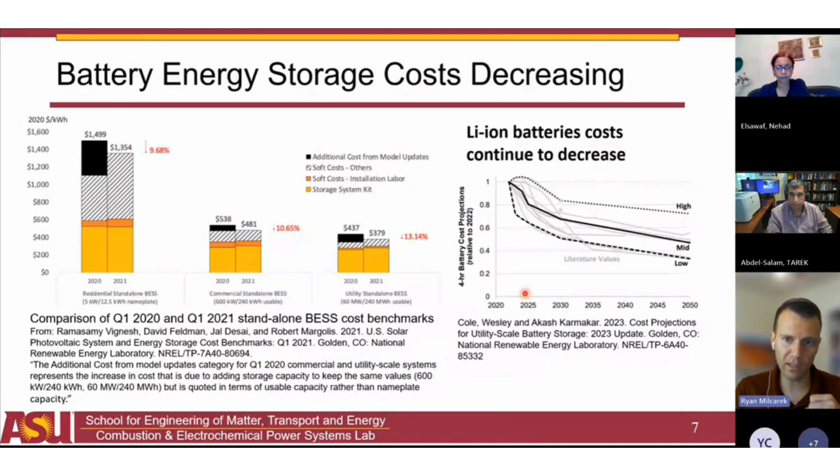But even a more recent report, we do continue to see this sharp decrease in energy storage costs. So this was based on a baseline of 2020, and here you see 2022 data. In 2022, when this came out in 2023, and projecting forward, we see a substantial decrease to the point where by 2025, we're projecting that we'll have had a 20% decrease in the capital costs of 4-hour battery energy storage. And then if we look ahead to 2030, only about 5 to 6 years ahead, we're talking about a 30% decrease in the cost.

So almost every year of this project, I've had to ask my students to go back and update the costs again, because it's changing some of the conclusions. Something that didn't really seem feasible a few years ago is all of a sudden looking more and more feasible as the costs change. Okay, so something to keep in mind, one of the reasons why it's being talked about.

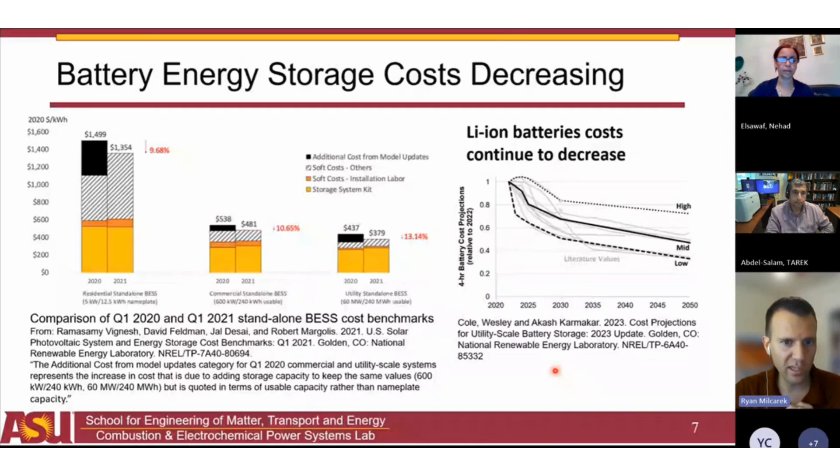So battery energy storage is increasing. What is it being used for? Well, there's a lot of usage, and if you'd asked me that question a couple of years ago, the answer would have been frequency regulation. Frequency regulation was always the dominant thing with energy storage.

But all of a sudden, the number one now is arbitrage. Arbitrage is the ability to try to leverage energy use and pricing for the times that you want it versus times that you don't. And all of a sudden, that has really seen a big uptick since about 2019. And 2019 and before, frequency regulation was pretty much everything, and then you had these other little usage of energy storage, but they were all minor in comparison.

Then since then, arbitrage has been on a steady increase, where we're seeing more and more capacity being installed for batteries for this use case. And so what is energy arbitrage with batteries, and how exactly do we take advantage of it, and how does it benefit clients? That's one of the things we'll be talking about, and then the extension of that to reducing carbon emissions is what we're going after today.

So a little bit of background just to make sure that we all understand why this discussion is happening. It probably doesn't surprise any of us that the cost of electricity varies, right? We're probably all used to that. We're used to probably seeing a graph kind of like the following.

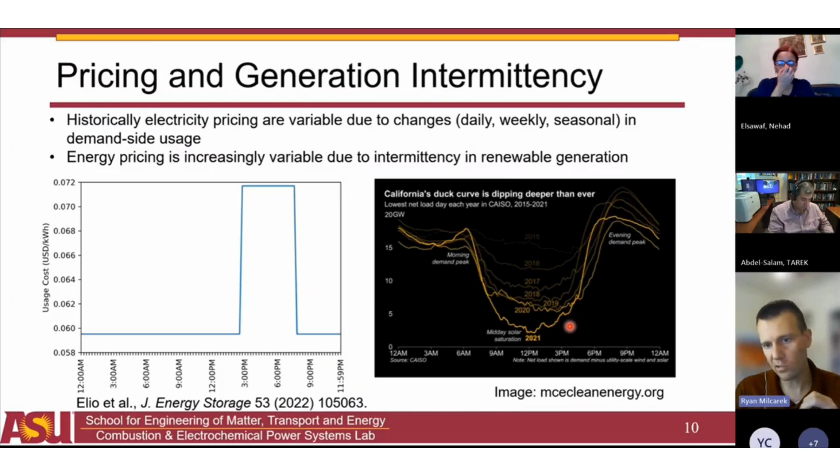Why is this happening? Well, I don't probably need to say too much about the California duck curve. We're probably all pretty familiar with that. We see, of course, this results in really high penetration of solar, results in really low electricity costs in the middle of the day. It's this ramp that's so concerning. That's what has electricity costs really jumping up towards the end of the day. And we'll see how we can kind of leverage that with a battery energy storage system here.

And that's the general expectation in conversations I've had, is that where we used to see peak pricing around 3 to 6 p.m., it was kind of typical. We're now expecting peak pricing to shift, especially here in Arizona, to later and later hours, as late as 10 p.m. and potentially beyond, which again is all related to some of these changes that we're seeing.

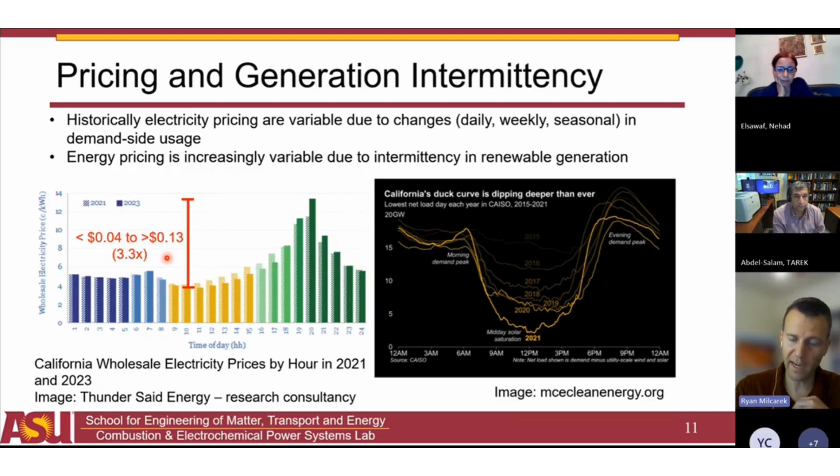So big changes happening due to renewable penetration, and all of a sudden things that maybe weren't as possible in the past are becoming real opportunities, and that's where battery energy storage is coming in with this energy price arbitrage. You can see here, if you just note that difference, 4 cents to 13 cents, that's more than a factor of 3 change, okay? So that's what we can take advantage of with a battery.

How do batteries do it? Well, we've referred to these programs as some sort of a demand response program. If we're just talking about this load shifting situation, we sometimes refer to that as price arbitrage, okay? It's the fact that the prices differ, and so we try to buy electricity when it's cheap, and then we try to give back or use our storage when it's more expensive.

So for example, we can discharge, in this particular client's case, in the afternoon. We've already shown that generally we have highest pricing in the afternoon hours, and that differs by location, but it's true in many places. This particular client, for whatever reason, can't shift this. They need to have this really high energy use at the end of the day. Well, the best thing for them to do is to just discharge it. We call that peak clipping, trying to reduce that demand on the grid and ultimately save them money in the process.

The other thing that you then have to do is you have to charge that battery at some point, right? And you're ideally going to charge it when it's cheap. We've already seen late evening hours, and increasingly early morning and even middle of the day, becoming the time to charge because of the differences in the time of use pricing. So we call that valley filling when we start to bring our lowest electricity use up. And ultimately that accomplishes something we call load shifting. We're trying to redistribute that load.

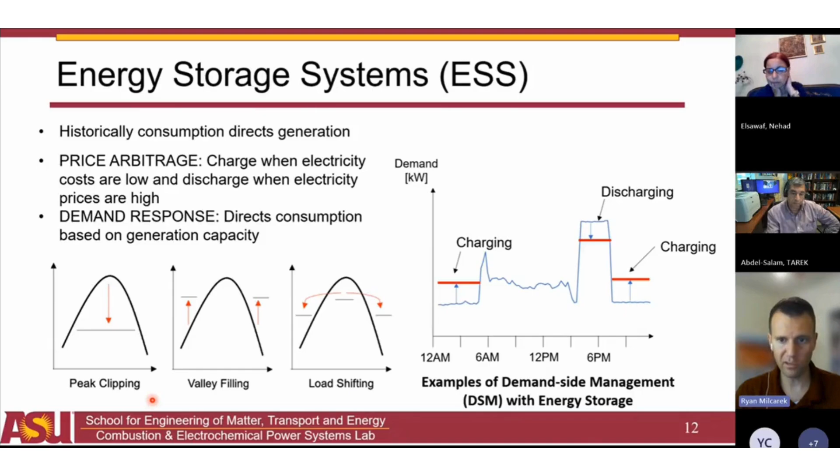That's part of a bigger effort called demand response, and I'll get into that a little bit, but demand response is really a big change, and we're seeing it talked about more and more. Instead of the historical case where consumption directs generation, demand response is when the utilities try to direct the consumption by putting in price triggers. Time of use pricing is just one example of demand response.

So if arbitrage is working, which we've seen from the graph is the majority of the installations, and I've shown you some of the reasons why and why the situation's changing, we might ask, can we do this with carbon emissions? It turns out that carbon emissions are not constant on the grid, and that probably doesn't surprise anyone. Our base load is usually nuclear energy in many states. That's the case in Arizona. It's one of our big base load power generation sources.

We see they're highest in the summer months, and that's the case here in Arizona. We typically hit our peak load sometime in July and August. Okay? And it'll vary where you are, but as a result of when you're hitting your peak, your carbon emissions will typically follow those general patterns, just based on where that generation comes from.

Okay. So instead of just thinking about price arbitrage and trying to get capital benefit, can we actually move these carbon emissions? For example, can we charge our battery when the carbon emissions from the grid are really low? And then can we discharge the battery when the carbon emissions in the grid are high? And then by that, actually save scope 2 emissions for particular clients and facilities.

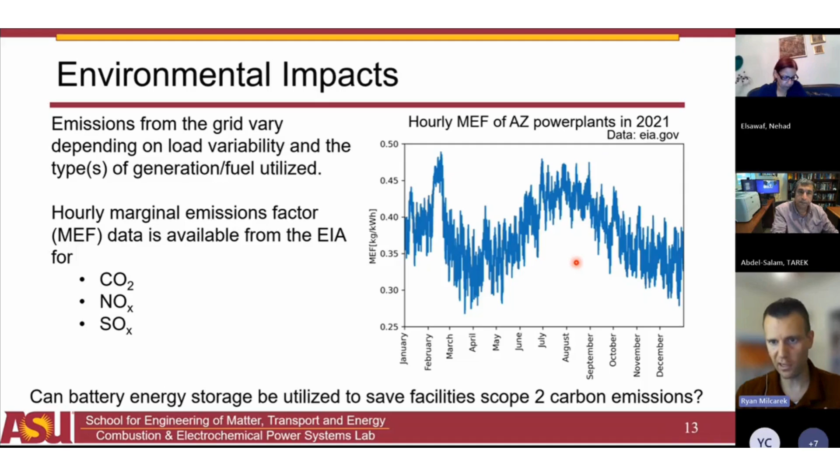That's one of the questions I'll answer towards the end. I've got a lot of background to give and setup to do to help you understand how these systems work, but that's ultimately where we're headed. So let me just give you a quick overview of some of the literature, the things that are happening in this field, and the methodology we use to approach this problem.

So battery energy storage is really common, being investigated a lot from a price arbitrage standpoint, from a peak clipping standpoint, and others. We've looked at a number of papers to understand who's working in the space and what they're studying. As you can see, residential, a number of studies in that space. Most of them recommend storage of really small energy capacities, on the order of 10 kilowatt hours of energy storage, and they have smaller annual revenues as you'd expect.

Whereas commercial buildings tend to have a much larger range, right? We see a lot greater size differences in commercial buildings. You typically talk about small commercial and large commercial. Well, you see some of that playing out with the differences in the energy storage sizing that are ideal. So these are other papers that have tried to optimize energy storage for various clients.

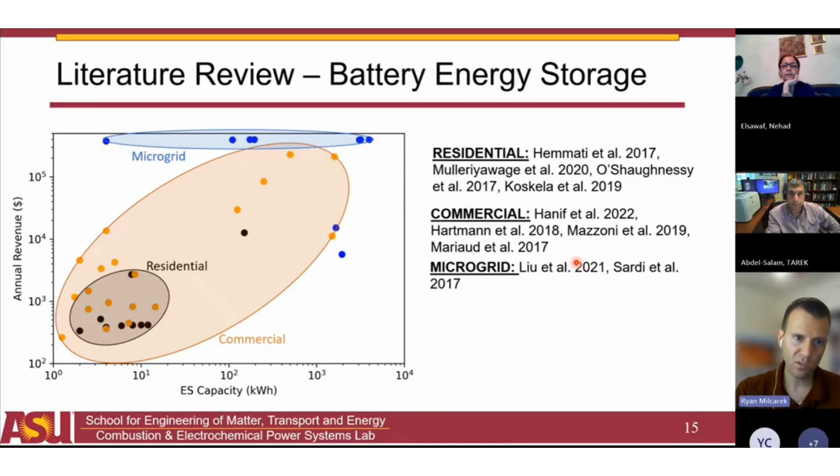We see microgrids, where typically you can maximize your annual revenue because you're typically fully off grid. So we see high annual revenues, a range of energy storage capacities, some distribution applications, some industrial applications, although we haven't found quite as many of those studies, and that's an area where our group works quite a bit, and we've been working with the local utility on. So we've done some recent work to try to understand what are typical sizes for industrial clients and how do they compare.

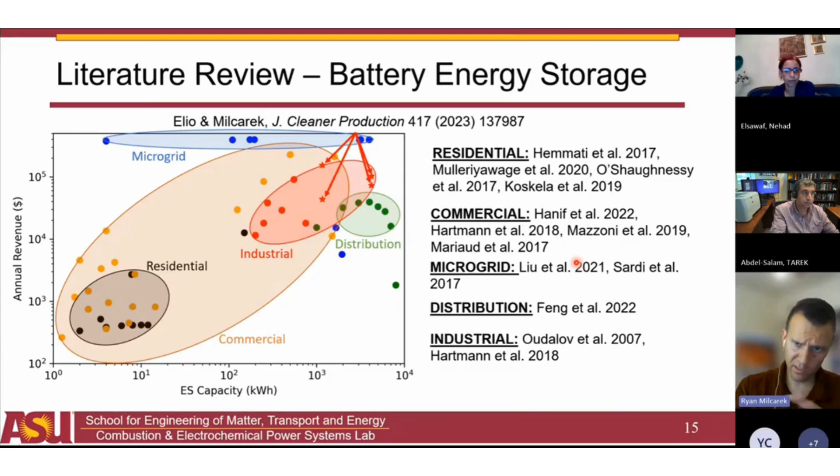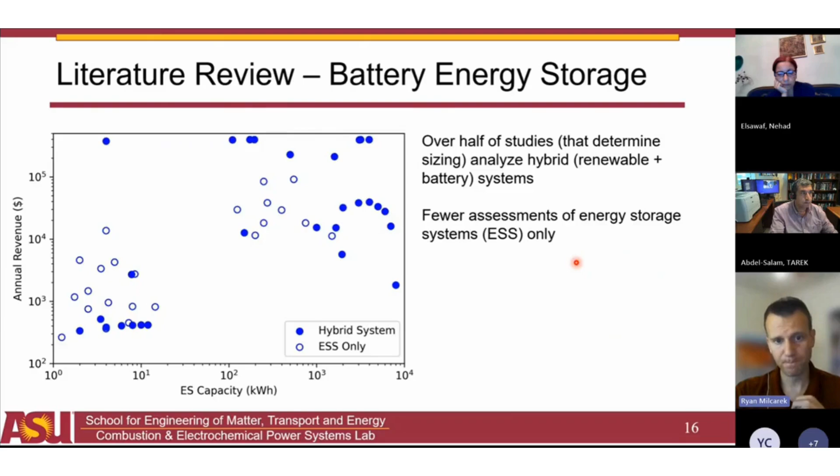Okay, so there's some work in this space, different people looking at optimization. I will note that a lot of these studies are actually hybrid systems. They're not battery only. We're talking about a renewable plus a battery storage system, the annual revenues and capacities from that. We're going to strictly limit ourselves today to energy storage only, okay? Much less studies in that space, but very interesting trends and results, which we'll show you when we start to think about battery as a standalone system for generation.

So now, what do we need to do to actually size these systems? Well, one thing we need from clients is real data. A number of these studies don't always have a whole lot of data from clients, and that is kind of a limitation, because the reality is clients' electricity use varies significantly. You can see this is what we call 15-minute interval data, and we see significant variations throughout the day in terms of the electricity use.

If you go day to day, we see a lot more fluctuations. These have been looked at for the entire week. We see the general trends. We can basically see that they're shutting down on Friday. Looks like they power down on Monday. They're starting back on Tuesday and Saturday. So we can already tell that this facility has different usage patterns. They're shutting down on the weekends, maybe starting up on Sunday again and then closing down on Monday night. So they have different maintenance schedules potentially.

We can average out that data, get general trends. It's all helpful, but really the average is not as important as the actual usage scenarios, because when we're talking about arbitrage, it's about what's happening in the little gaps.

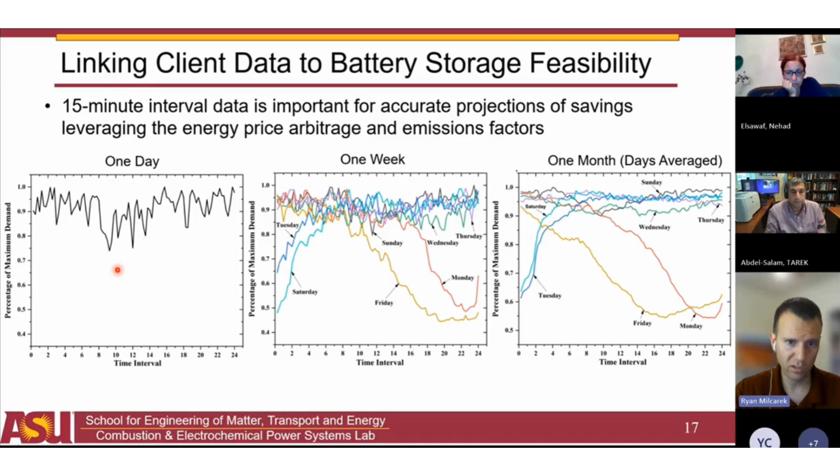That's what we need to know in order to assess feasibility. So one of the things that we've done in our modeling is we've made it so we can utilize 15-minute data to make sure we're getting really accurate predictions based on real clients' data.

The other thing we've noted is that you look at one client and you assess energy storage, that's great, but one client is one client, and that doesn't start to give you the bigger picture that we're trying to get with this study of how we think about energy storage from a much, much bigger perspective and across a lot more clients. So we'll get to some of that at the end.

But just two examples here. These are two industrial facilities. The one on the left, we'd consider that something of an intermittent process. So notice they basically have really low energy use in the mornings. Then we get really high energy use from about 3 a.m. to about noon. Then they're kind of shutting down, not as much energy use in the evenings, right? And then we see that they don't really operate too much on the weekends. It's mostly a Monday to Thursday operation.

We can gain a lot just by looking at this graph. This is kind of an example of what you might see in a bakery, for example, typically starting very early, preparing their product, and then often a lot of that energy use is gone by the end of the day. Whereas this other facility, kind of running continuously, we do see a little bit of a drop here between 3 a.m. and 9 a.m., but much, much more consistent throughout the day, kind of a continuous process facility. And this might be more common for what you might see in like a wastewater treatment plant, for example.

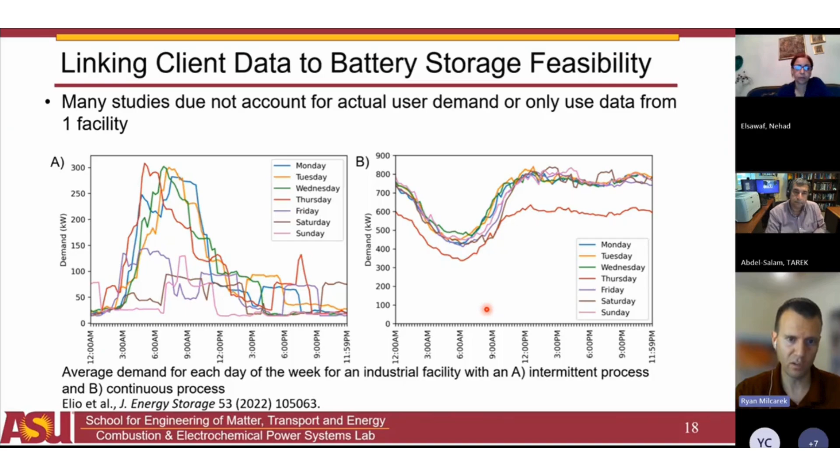So two very different facilities, and they're going to have very different answers in terms of the applicability of energy storage and their ability to leverage energy price arbitrage and carbon emission reductions. So how do we attack this? Well, first we need a model to do it. And we've got the data from real clients, but we need a model to tell us how would a battery system look for this client if we consider all the relevant factors for that battery system.

So the first thing we want to consider is the capacity. We're going to model many, many different energy storage capacities, and we're going to look at a range. Once we fix the capacity, we typically also fix a depth of discharge. We don't typically take a battery all the way down to zero, or if we do, it's very rare we ever get that close. So we often talk about trying to stay above 20% of the capacity. Okay, so you can see that kind of limits our general range that we're operating in.

We can't charge these things infinitely fast. They are limited, right? So we have, for example, a maximum charge rate. We need to make sure that we stay always below that. So we build that in as a constraint. We have similarly a maximum discharge rate. We talk about the number of C's of the battery, right? Those are what those are related to. So now we have to fix that. We can't be anything less than that line.

Okay? And then ultimately we might want to charge and discharge at certain times. We want to have time of use pricing built in. All of those factors to consider so that our battery system's trying to optimize around all of them to really tell us best case scenario what can happen. Okay. We can look at different energy storage types. Today I'm really going to talk about lithium ion as one of the big ones that's being applied in this space, but the answers change a little bit depending on the technology because they have different charge rates, capacities, costs, etc. But that's generally what the model's doing. It has all these factors built in that it's considering.

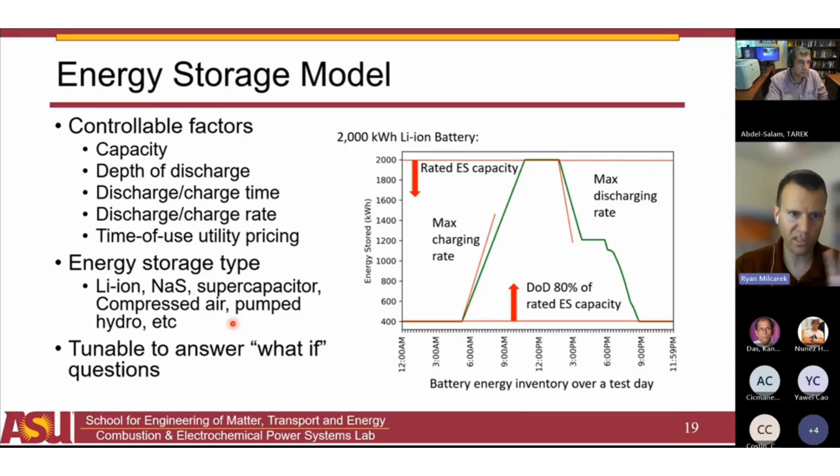And then the last thing that we did is we built in the economics of it. And you'll see here that we did a couple modifications compared to what's typically done in the literature. One is that many people consider capital costs to be essentially zero when you have nothing installed. And while that's true, we know that if you install anything, there is a little bit of engineering, procurement, construction costs, so it isn't going to cost $0, right, for a really, really small system. There's a little bit of a difference there.

We build that into our model to account for the fact that when you get really small, it doesn't just become really, really cheap. There actually is some cost that is still kind of always there.

Then we start to build out our cost savings. This first term evaluates cost savings. We built into it some potential for utility costs to change, and we'll see how that affects the system. We built in operation and maintenance costs, and the ability for those costs to change over time, which they can. We look at capital costs, and now we also have engineering, procurement, and construction costs built in as well. Some slight modifications from our model compared to others, but in general we're attacking a lot of the same rough concepts and trying to assess energy storage feasibility.

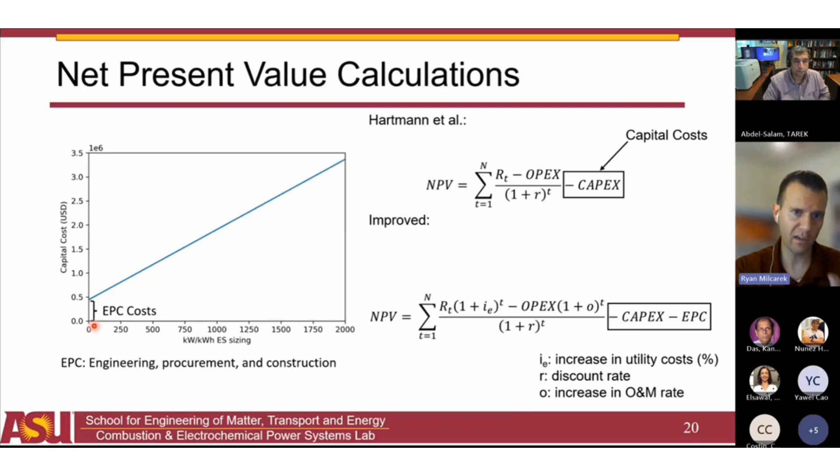So some results, preliminary, but there's a lot I'll have to share with you today. The first is understanding how our objective function works. This is what we're trying to maximize, our savings here. How does this actually affect a battery system?

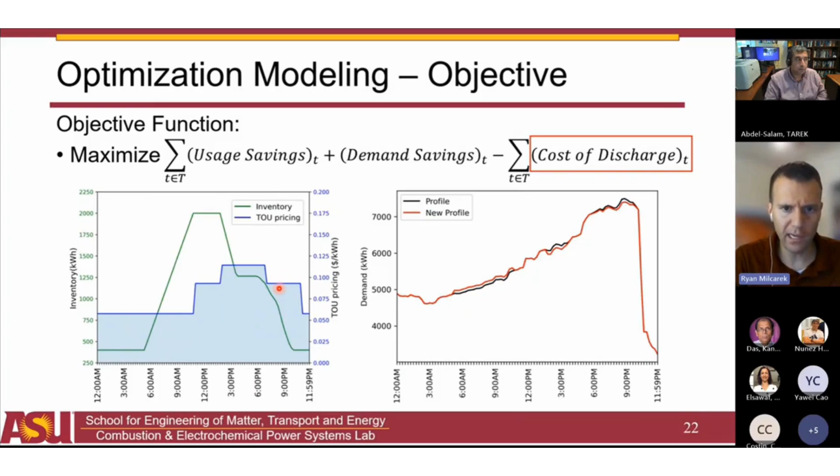The last piece we've got to add into this is what's called the cost of discharge. How much does it actually cost us to discharge a battery every time, and how do we pay for it? There's two ways to think about that. When we first started, we thought about breaking up the cost of discharge in terms of the entire capital cost that a battery has over its entire life, and the energy use of that entire battery over its lifetime, basically breaking out that capital cost into every single time it discharges. So our first model, we modeled it with this modified factor here, which tells us a lot about how we can break it up over the entire time. And then we also said, well, that's kind of looking at the battery investment going forward.

How do we price it if we're thinking about it in the future, and we haven't installed it yet, and we want to break up that cost. But after we've installed it, if that cost has already been spent, well, maybe we want to think about the cost more as operation and maintenance costs on a regular basis.

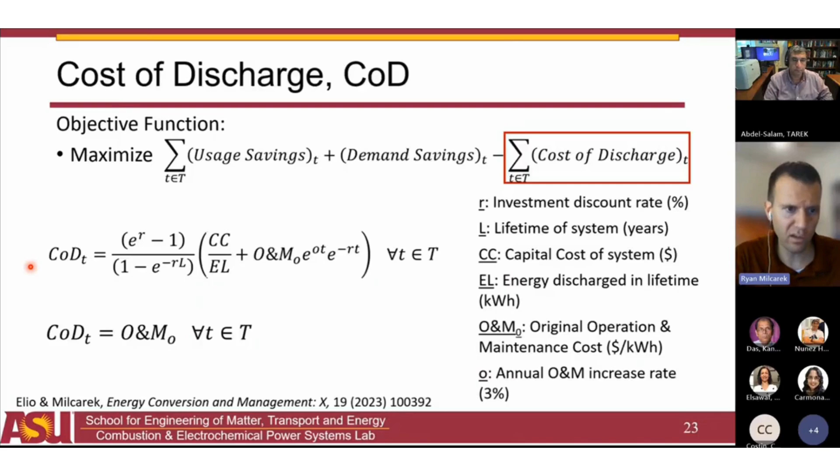So these were the two models that we used for the cost of discharge. You can see some of the factors that are considered in those, and ultimately that led us to two very different results.

We then lumped our first cost of discharge model into this general framework, which we call peak clipping. This model really works only when the costs are sufficiently high, and typically that means it only targets the demand savings. Usually the cost of discharge is higher than the usage savings, so it doesn't actually charge and discharge very often—it's only going after peaks for a facility.

Whereas our other model, load shifting, really targets almost every day, as long as the cost of discharge is lower than the usage savings, which it typically is. Then this is going to charge and discharge on a regular basis. Let me show you what that looks like.

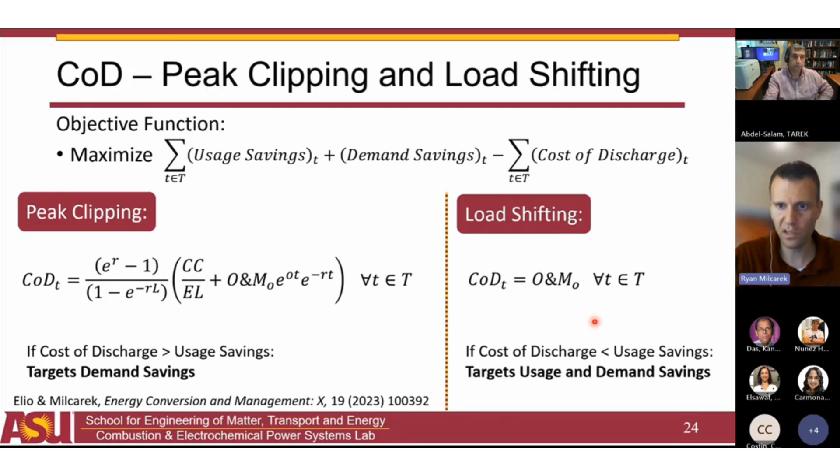We've been working on both to try to understand what strategies make sense for clients. And ultimately, we'll show that load shifting is really the better strategy, but I wanted to set that as a baseline for our model.

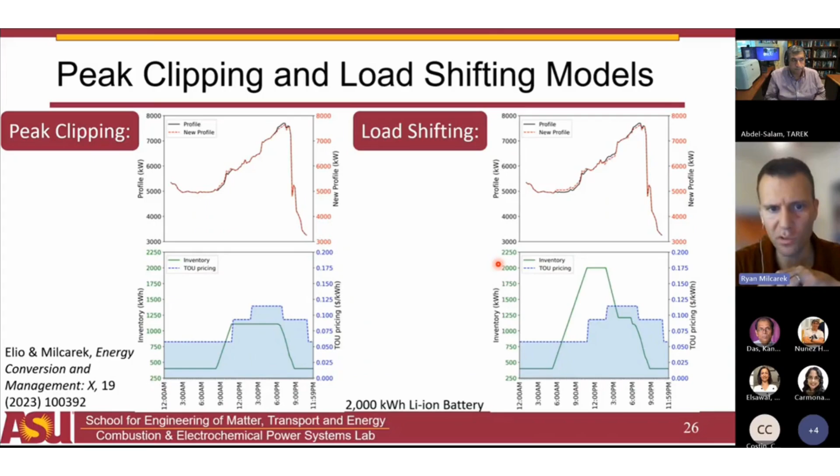Now, what does it mean in terms of the actual day? Let's just take a quick look. This is that same facility, just looking at that one day where it hit its peak.

Notice in the peak clipping strategy, again, we're coming in basically right at the depth of discharge we can go to. We then ultimately are going to charge, and you'll see that even in the load shifting strategy, we have a similar point here. This is about the same, this charge is about the same.

What's different, though, is that in the load shifting strategy, we don't just go for the peak. Notice we charged once, discharged once with the peak, and that was it. Whereas in the load shifting strategy, we actually charge, discharge, and then discharge again, in order to try to maximize both usage and demand savings for the client.

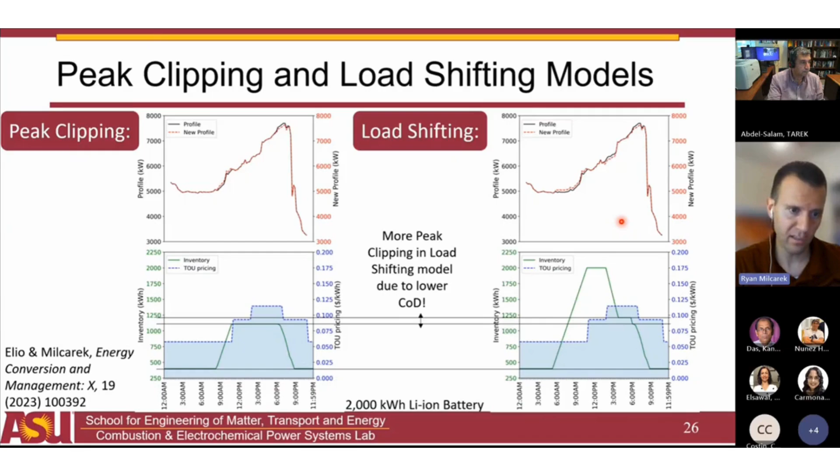And it turns out that in the load shifting strategy, we actually get slightly more demand reduction just because of the way the model optimizes, in comparison to the peak clipping strategy. So that's great—we've now demonstrated that we have two models that can show us how to shift our demand for various clients, optimizing it for load shifting or peak shaving strategies.

Now, what about this demand response I talked to you about? We said that time of use pricing is an example of demand response, but it's not the only one. There's also something called event-based demand response. In Arizona, that typically means it only occurs around 7 to 8 times per year—these are typically the 7 highest temperature days of the year. So for us, between June and August is most of our demand response events.

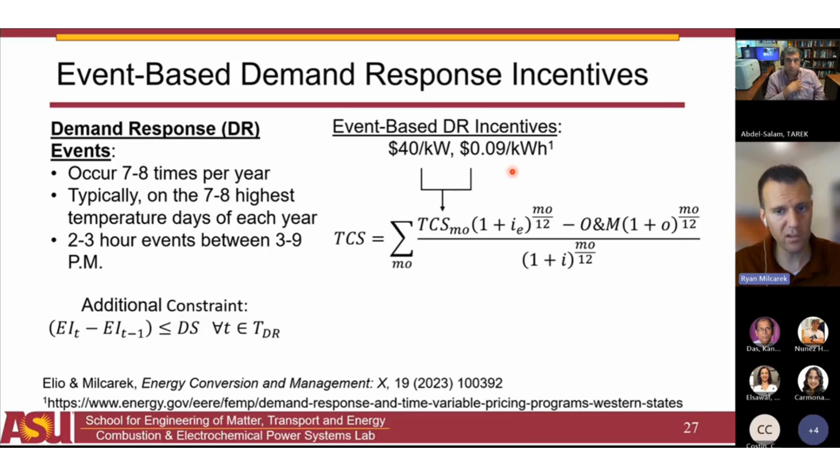The demand response events in the western states typically run around $40 per kilowatt and 9 cents per kilowatt hour. Those are big savings compared to the differences you can achieve by just leveraging energy price arbitrage alone. So we build that into our cost savings, and again we consider a lot of factors. We're taking into consideration the increase in utility costs, inflation rates, discount rates, and ultimately the increase in O&M rates. So all of those are built in.

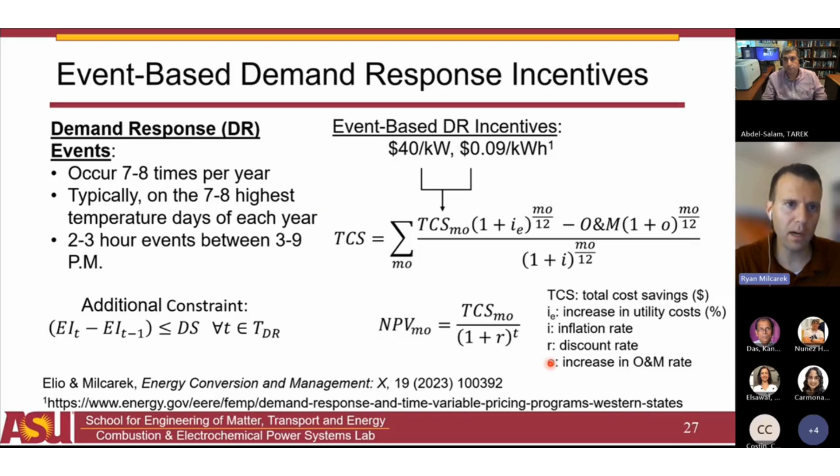We'll show that a lot of those factors aren't very significant in terms of the profitability of this technique. So now let's add to our model event-based demand response incentives and see what happens. I want to first show you the exact same facility, and in this case, this is a day of a demand response event.

The demand response event happens to occur right around here, but in this case, it's not the peak for the entire facility for the month. So if we don't consider demand response enrollment with a peak clipping strategy, the battery says don't do anything—it's not charging until the very end of the day. It looks like it's going to get ready because the next day it might hit its peak, and so it's getting ready for that event, but ultimately it just ignores the demand response event.

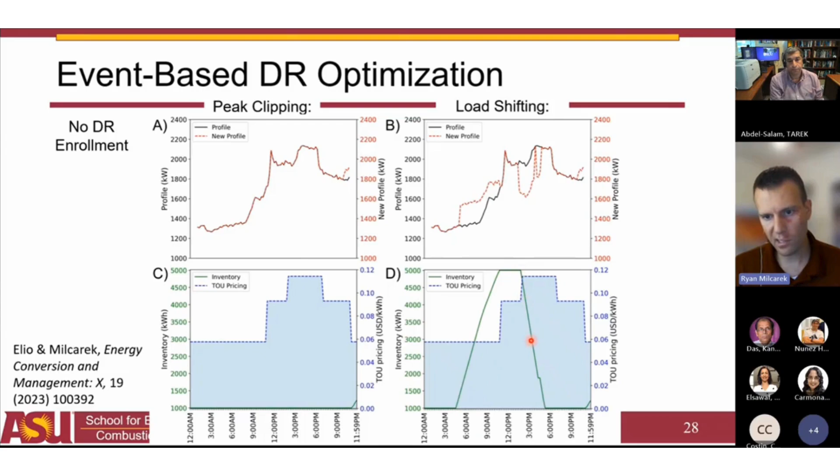In comparison, with the load shifting strategy, just like we expected, it charges when it's cheap, hangs on during the shoulder months, and then discharges as much as it can during the high time of use pricing. But it turns out that DR event is a little bit later, and it completely misses it with the load shifting strategy. So now we build in that constraint of DR enrollment.

And all of a sudden everything changes. Peak clipping now does charge, and now we discharge during the demand response event. We're trying to maximize those savings, and notice it hangs on until the end of the day when that event actually occurs. Load shifting does something fairly similar.

We're charging, okay, a couple of times in fact. We discharge right at the point where time of use pricing comes up—that's leveraging energy price arbitrage. And then we save it, so that we can discharge as much as we can for the entire demand response event.

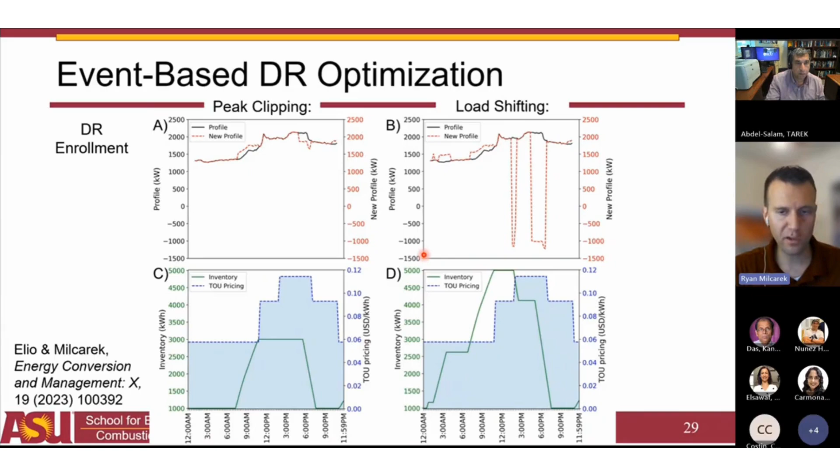In fact, if you look at the scale here, notice that we've actually put energy back on the grid in this case, because that was the most economical strategy, as long as the grid allows for it—to fully discharge and push some back to the grid because of those significant demand response savings. So now we see that the model not only accounts for two different control strategies, but DR enrollment as well.

In terms of the economics, just to give you an idea more clearly, in red here we have our total savings that have been optimized over a bunch of different energy storage capacities, from 1 to 10,000 kilowatt hours. You'll see that when we do the peak clipping control strategy, almost all of the savings are demand savings—we have very little usage savings, and also fairly low O&M.

When we go to load shifting, we still have fairly significant demand savings, but our usage savings has come up a lot. And also our O&M costs have come up a lot because we're charging and discharging that battery much more frequently, so we have to now account for that in the overall savings we achieve.

When we switch to DR enrollment, this bottom strategy, all of a sudden everything changes. Those DR events are the majority of the savings. Notice that the demand savings are still important with peak clipping, the second most important, but the most important is ultimately the DR savings.

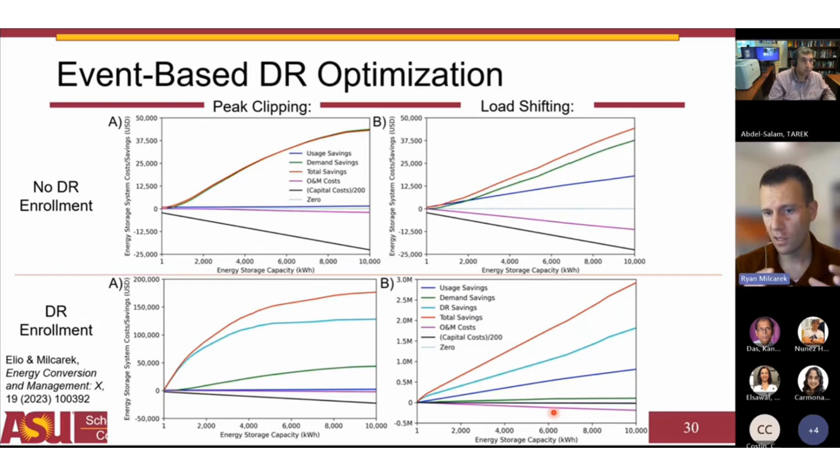And similarly in the load shifting strategy, DR savings are substantial, but now usage savings actually become quite significant, and demand savings not as much, in part because the DR event actually takes care of a lot of those savings anyway.

So let's look at this as a breakdown over a couple of years for this one particular client. You'll notice what we're doing in this graph is plotting ultimately that initial capital cost. You can see this particular battery is going to cost them around $4 million, a little over, to install. And then ultimately we're going to be regaining some of that—it's basically a cash flow diagram.

We can see that we become profitable with this battery storage installation sometime between about 2.5 and 3.5 years. You'll notice there's a general upward trend with a slight increase, but then we have these steps. Those are our demand response events, kicking in right around the 6th month, around June. Those big savings are what we see year over year, and that's really the reason this becomes profitable so quickly—because of the demand response savings.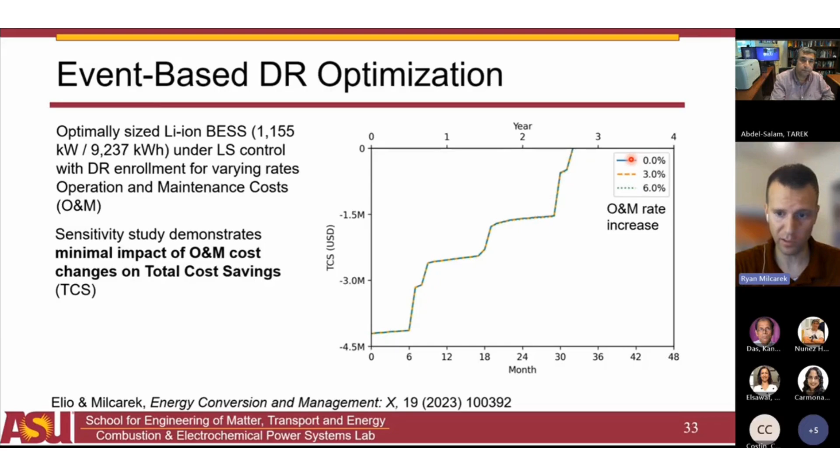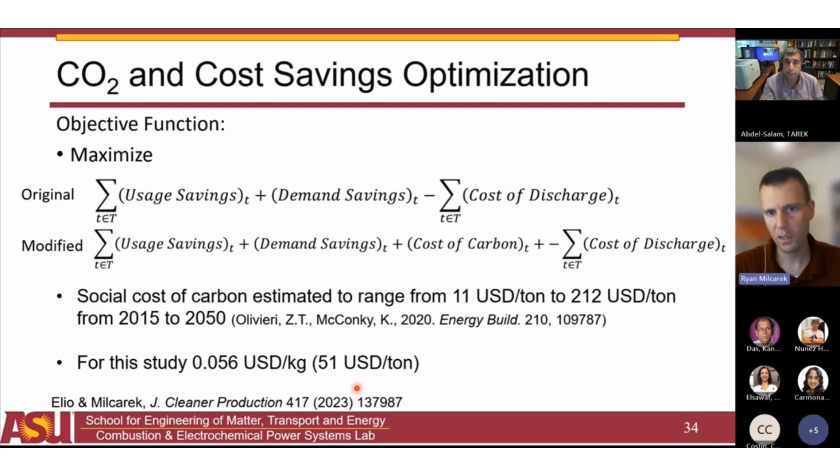So now, getting to the point we were trying to get to from the beginning: can we do this not only for price, but for carbon? To do this, we need to maximize those savings, but by giving carbon a cost. We do that by building an additional term into the optimization, but we need to fix a price to it to put it on the same level. So we'll give it a price based on the social cost of carbon, which is estimated anywhere from $11 to $212 per ton of carbon reduced. We'll use a value of about $51 per ton—the current administration's point estimate—which is obviously variable, but it gives us a starting point to see what our model can do and how we can reduce carbon emissions by building this in.

Now I want to compare a couple more of these graphs. What you're seeing is we're enrolled in demand response with a load shifting strategy, since that's the better strategy in general for economic feasibility. The only difference between these two is whether I'm optimizing for just cost. On the right, I'm optimizing just for cost, whereas on the left, we're optimizing for cost and carbon dioxide reduction from the grid.

Notice they're pretty similar—ultimately the same initial profile. At the beginning of the day we charge in both cases, but the carbon-optimized one stops charging, then charges a little more, ultimately stopping between about 7 a.m. and noon, whereas the cost-only one does quite a bit of its charging between 9 a.m. and noon. Then the cost-only one discharges everything quickly, whereas the carbon-optimized one holds that charge longer before discharging.

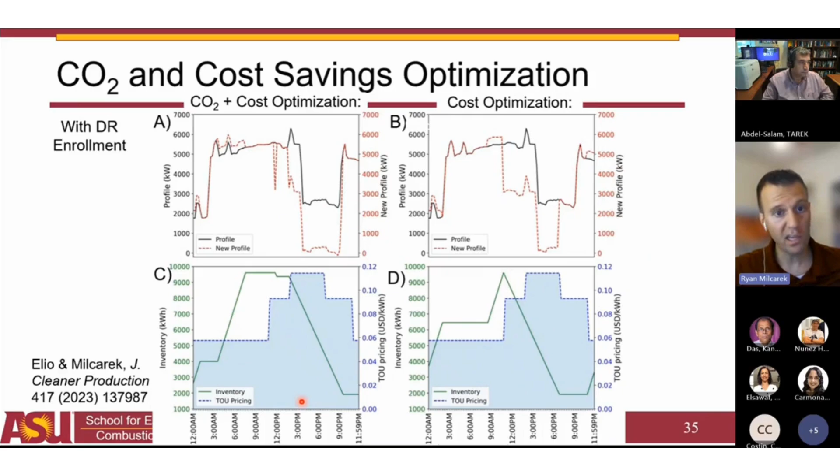How do we explain these differences? The only difference is how we're optimizing it—same time-of-use pricing and other factors built into the model. The difference comes from what we call marginal emission factors. You can get these for pretty much any state and see how the grid intensity for carbon dioxide, NOx, or SOx changes hour by hour. The data is only available hourly, which isn't as frequent as we'd like, but that's what we have.

You can see right here, around midnight, that's when we have the lowest carbon intensity for this particular day, so of course the battery takes advantage of that by charging. Then we hit this point where we're a little bit higher in terms of our emissions.

So we're going to not do anything there. Then we hit a low point in the middle of the day, and we're going to fully charge at that point to make sure we're fully charged before the time-of-use pricing goes up. Then we hold on through this period when we've got high emission factors from the grid. Ultimately, this is the point where we start hitting high time-of-use pricing, and we're going to discharge through all of that.

So now that we've optimized for not only cost but also CO2 emissions, we've built a profile that tries to avoid those times of day when we're hitting high emissions from the grid. Looking at the cost optimization alone, it's probably no surprise to any of us, we charged a lot even when the rate went up.

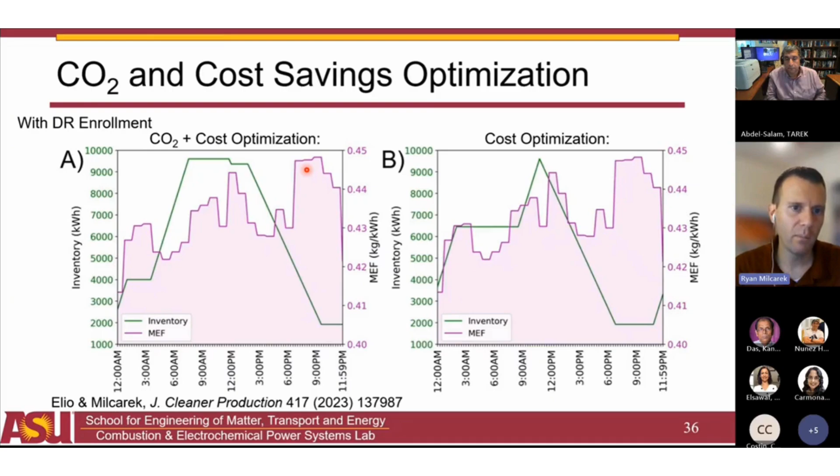We didn't do anything when ultimately we had really low emissions, and then we charged again when we had high emissions, and then we discharged everything right away. Ultimately, you'll see that by shifting out a little bit to the right, we avoided some of these high emissions at the late part of the evening. So we took advantage of all of that by optimizing for both.

With that built in, let's look at the scenarios and how this works out for a bunch of clients. Getting a little bit of feedback there, if anyone could mute, if that's all right.

What you can see here is 10 different clients, 5 industrial, 5 commercial, and what we're looking at is discounted payback period. You'll see that the peak clipping strategy is not very economical in terms of discounted payback, about 50 to 70 years for many of these clients. Whereas load shifting with DR, we're really hitting pretty good paybacks, around 10 years for most of these clients.

What's even more interesting, though, is that we can actually save significant carbon dioxide, right? Between around 0.1% or less with the peak clipping strategy, up to in the ballpark of 10% or more when we go to load shifting across these clients.

Now, this is still pretty early because we've only run really one scenario to try to understand how much carbon we can really reduce. This is scope 2 emissions of carbon right from the grid.

Ultimately, though, we're optimizing this for a range of scenarios to try and understand, when the demand response pricing goes down and then CO2 savings become more important, how much can we really maximize? We're thinking about the trade-offs between the cost of carbon and other potential savings that allow us to maximize it, and what those prices should be if we really want to see both really high savings for the clients and also really high CO2 savings from the grid as well.

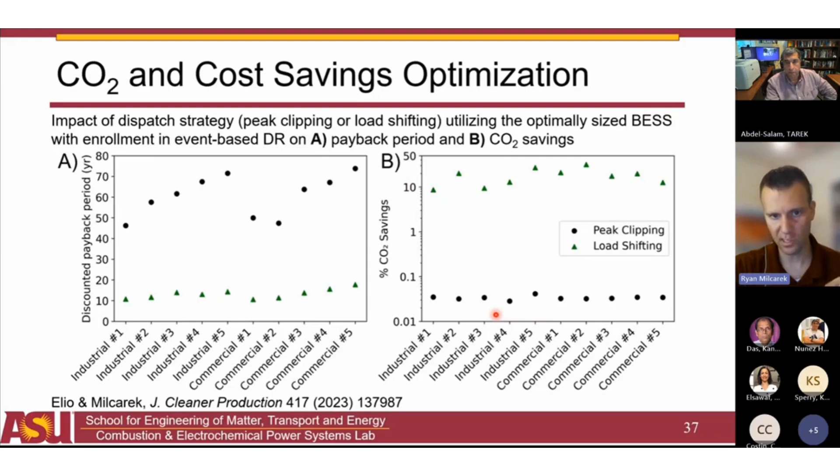How do we co-optimize both, and what are the right points and price points to be able to hit and optimize both of those together? Those are some of the things we're working on right now, and I'll tell you how we're doing that. This is really getting into some of the future work.

We've been able to get data for about just under 1,000 clients now, representing a range of commercial and industrial facilities. What I've plotted here for you is just their different NAICS codes, just the first 2 digits, so you can kind of see what types of facilities we're talking about. We do a lot of work with industrial facilities, so we have quite a few here in the manufacturing space that we're interested in, and we'll be optimizing across, but we've got a lot more data for all of them.

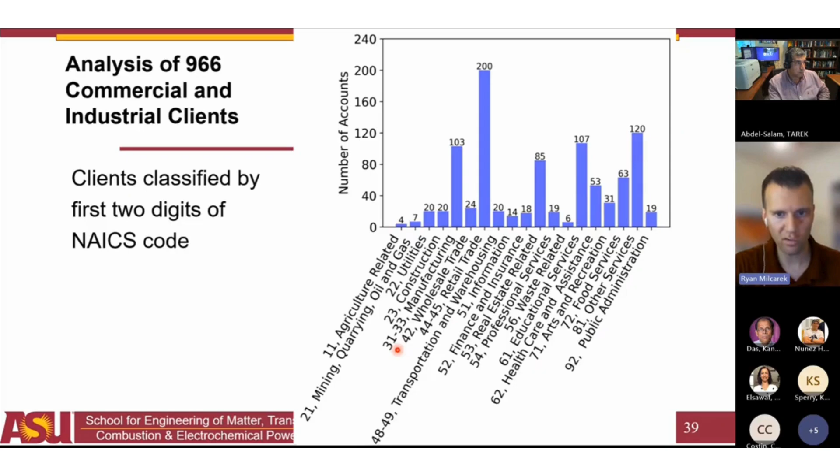What we're ultimately doing is we're running this optimization code through all of these clients to understand bigger picture trends that you can't see when you only look at 1, 2, or 3 facilities. And these are just some really preliminary results that just came out recently.

We've optimized for different control strategies, discharge time, so that's the amount of time the battery discharges for, and you have a lot of choice there. Ultimately, we've optimized it across a large range of energy storage size and demand response benefits, and we're also going to be adding to this the CO2 savings.

One thing I'll note is that almost every one of these clients optimizes for load shifting. And there's about 7 or so that optimize for a peak clipping strategy, but ultimately, even when they optimize for peak clipping strategy, the load shifting strategy is only about a month or 2 difference in terms of the payback period.

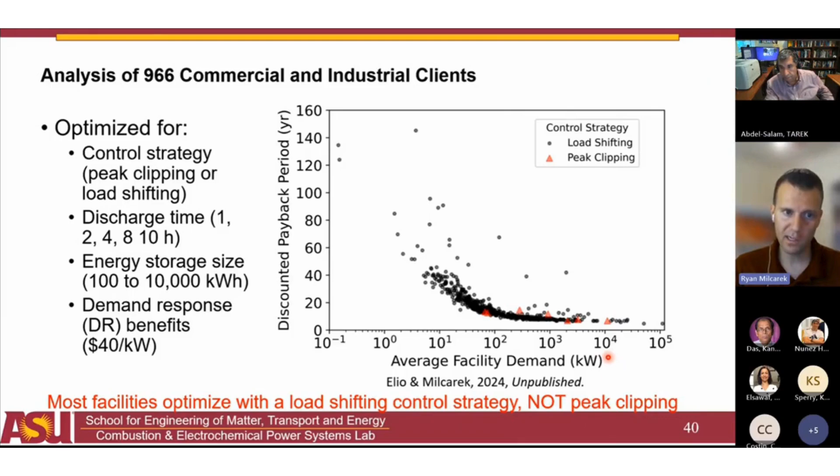So generally, the most economic opportunity for them is to load shift. And you can see that's true for almost all these clients across a large range of average facility demands. We also see that these actually can be really competitive. You can't maybe get a good sense of the scale here because there's a large range, but some of these clients get down to about 4 or 5 year payback times at the minimum, a number of them optimizing around the 5 to 10 year range. So actually, this is really cost competitive, especially if you can take advantage of demand response benefits for these clients.

So with that, I'll try to wrap up here by saying that we've looked at a number of control strategies. There's what we call load shifting and peak clipping. Even though there's a lot of discussion about peak clipping, it's really generally not economical from what we found by looking at real data for a bunch of clients. It's really the load shifting, that daily shifting of the energy use profile, that really maximizes savings.

And that's probably not too surprising for those of you who work with on-site generation. We generally know that if you install it, you use it more. You don't install a CHP system to run once a year, right? And that's pretty true here as well. We want to use it frequently.

Okay, another general thing we found is that demand response events are critical. The pricing and the savings for them is so large that it really drastically changes the feasibility of battery energy storage, bringing it down into the 5 to 10 year range for most clients. And that's based on some pricing from the last year or two. As I told you in the beginning, that pricing keeps coming down, and so we're going to see a further reduction in that payback period as we go forward.

We also see that we can actually reduce scope 2 carbon emissions. We've got a lot more work to do in this space. I've just shown you some of the early results, but we do believe that we can see pretty significant scope 2 savings just by thinking about when to charge and when to discharge the battery. Ultimately, we'll be able to make a lot more conclusions once we've looked across a really large set of facilities to understand what the big picture trends are, and hopefully to understand what it is about those facilities and their energy usage profiles that makes them really good candidates for these strategies.

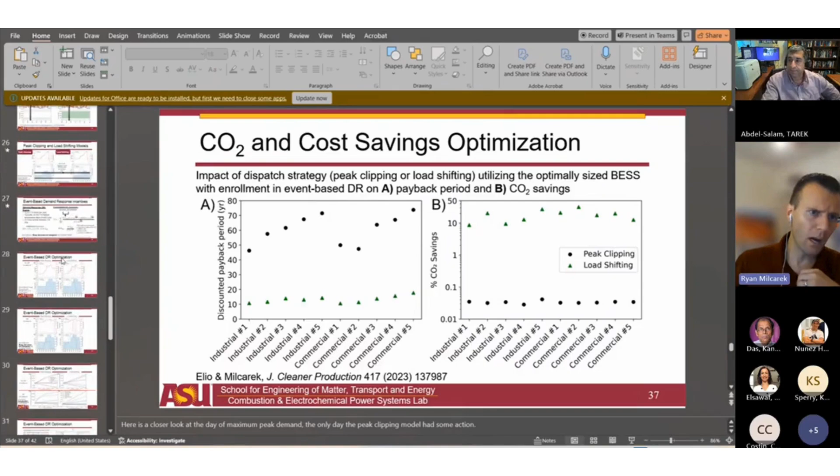Okay, thank you. Another question here. Thank you for a great presentation. I was wondering, what is the discount rate that you used in your NPV analysis? If I'm not mistaken, for a lot of these analyses, I think it was around 3%.

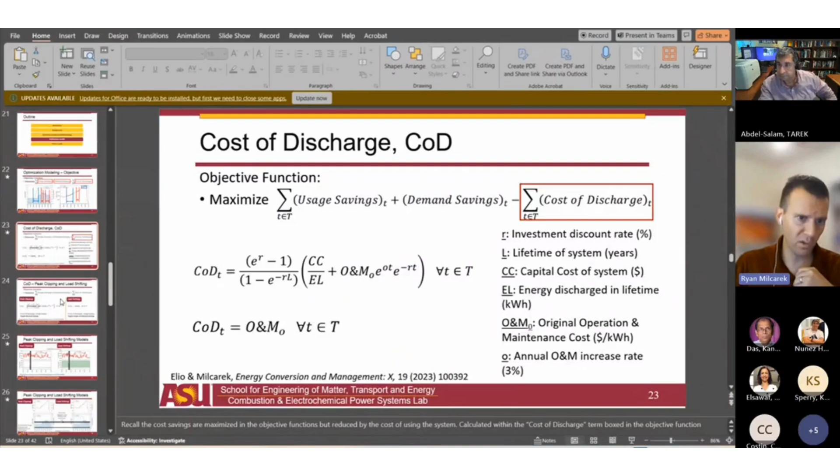So that was definitely something that you can vary quite a bit, although it makes a little bit of an impact, but I think we used right around 3%. I have to go back and double check if we've maintained that consistently across all of our studies.

Thank you. There is a follow-up question to question number 1. Are these facilities going to be able to participate in the greenhouse gas credit sales? If you did this, could you try to use this? That's a great question. I don't know if we know the full answer to that. We know for sure that from an industry standpoint, they can use this as justification for trying to meet some of their carbon reduction goals.

One of the challenges that a lot of people note with this kind of work, we're looking at historical data to try to say what's the potential, right? But ultimately, as you start to have a bunch of these systems, they're going to start to shift how the entire grid operates. And so in the long run, we're going to need a system where you can know instantaneously how that's changing, because you're not going to be able to look back at historical data.

So I suspect there's going to be some challenges in terms of having that as justification, but I think a company can certainly look and say, well, by charging and discharging here, they will be able to quantify carbon emissions reductions from the grid and potentially take advantage of those savings.

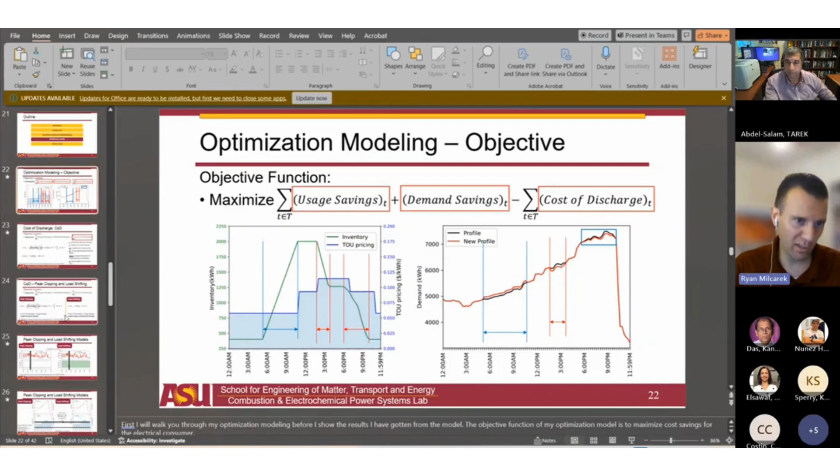So I showed you one scenario here where, for example, under the demand response scenarios, we actually want to be a net exporter with that battery system at certain times of the day, during the demand response event in particular. Well, some regulations do not allow for that. It depends on if you've gotten certain incentives to install the battery and so forth. And we've seen drastic changes, right, in solar in this space, where it used to be a lot of discussion around net metering. Well, now it's discussion around net billing.

We shared some of these results with the utility company, and they said, wow, we may not want to incentivize battery installations for demand response. This makes too much sense for the clients and maybe not as much for us. So we're still kind of at the early stages, because you're seeing this rapid growth in the use of this technology, but I suspect as more comes out, that will certainly make an impact.

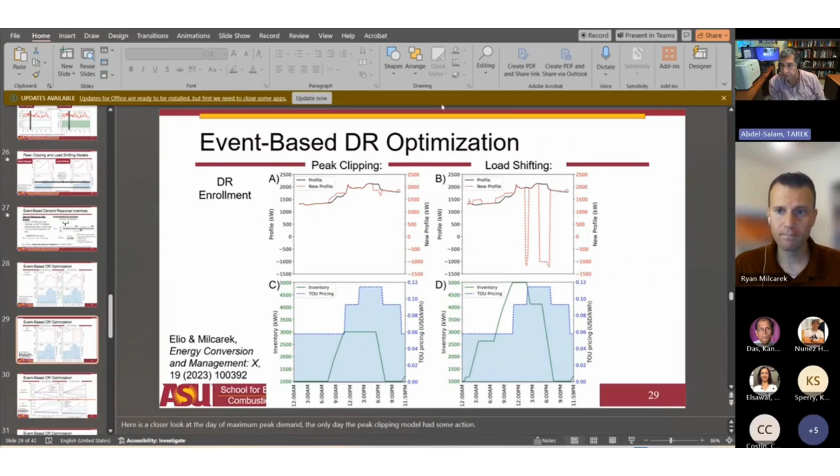We've got a lot more data coming, and we've recently started doing work with solar plus battery installations for all these clients as well. And we've got a lot to learn, but we appreciate the interest from all those in the field. Thank you very much.